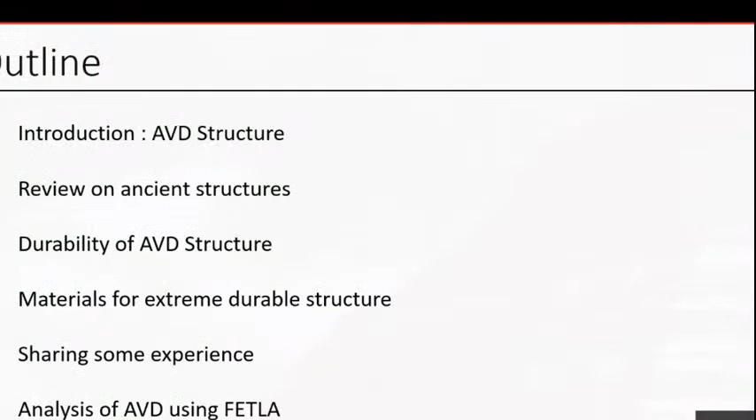We'll be discussing what AVD is, because AVD is nowadays not much practiced, so I won't be surprised if many people are not aware of the terminology AVD. We'll review ancient structures and see why these AVD structures are durable, and why structures constructed by us are not durable, at least in comparison. We'll talk about materials, and I'll share some of my experience. And because this is organized by ISSE, the Association for Structural Engineers, and the eminent Walchand Engineering College, I thought it worth discussing the analytical aspects. I'll avoid going too much into equations, but it's my duty to share some analytical facts and aspects of AVD structures. So that's what I've covered in this presentation.

So what is AVD? AVD is basically arches, vaults and domes. I'll try to correlate it with our current practices so you can grasp it quickly. Arches are the ancient equivalent of lintels, or rather, lintels are a replacement for arches. And the roofs we construct today, like slab and beam, along with walls, are replacements for vaults and domes.

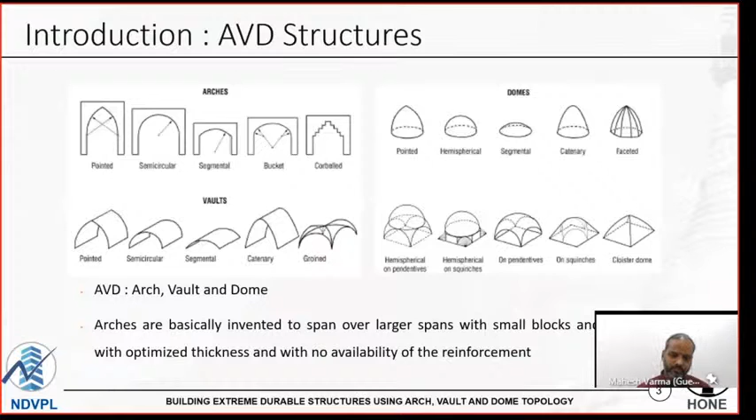I'm showing you two early human constructions. One on the left hand side is a flat shape construction in England. Archaeologists have diversified opinions on whether it's a place of worship, a burial ground, or something different. But to me, as a structural engineer, it's a lintel, a flat lintel. Human beings constructed this 5000 years ago using heavy flat shaped stones weighing many tons. It's one of the world's wonders because it was constructed 5000 years ago.

On the right hand side, you can see an aqueduct construction done by Romans almost 2000 years ago. Now why did humans shift from flat shapes to arches? It's because he understood that if he wants to span over a larger distance, it's very difficult to handle a flat shaped stone of that span. So if he wants to construct a larger span with a smaller stone, the answer is arches.

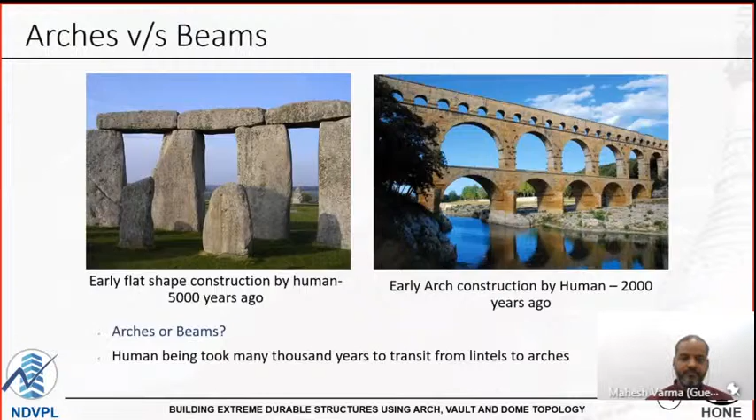I tried to find the answer in nature. I believe that as human beings we are already suffering huge losses because we are standing against nature. We are almost in quarantine at home, using masks and taking so much care. Even this webinar is a result of that situation. And the situation is probably created because we stand against nature, not along with nature. So I tried to find my answer in nature.

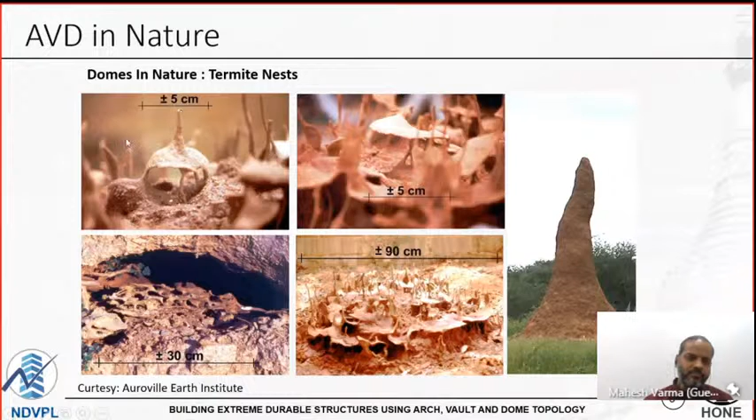I saw that any living being constructs in curvilinear shapes. Like here, you can see a nest of termites. It's a beautiful domical shape with a very meaningful tail at the top to balance the dome geometry. You can see the same in nests built by birds. You can find a few examples in ancient construction as well.

Our ancient builders most of the time used curvilinear shapes. Like here you are seeing the Kedarnath temple, a very famous temple, which has arches for the openings, not flat shapes, and it has been standing for many centuries.

On the right hand side you can see the construction we are doing today. Now we have associations for retrofitting, conferences for retrofitting, so many books, techniques, and materials for retrofitting. But I don't understand why we forget to ask ourselves the main question: why do we lead to a situation where we need retrofitting in even not 20-30 years? Almost as soon as we complete construction, we can see cracks over the structure, so we start applying crack seal before paint. So why are we leading to such scenarios?

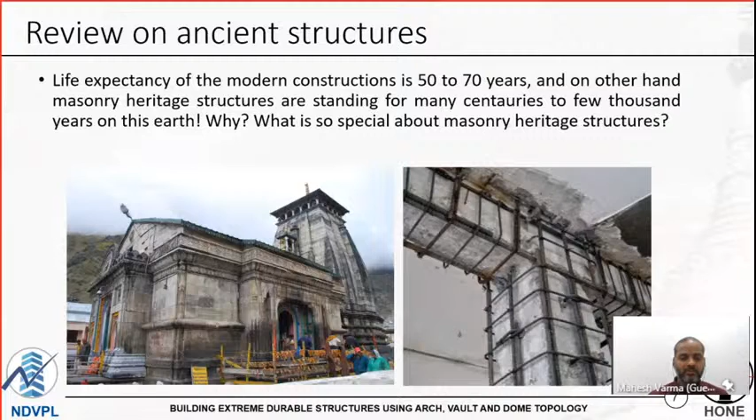And what is so special about these masonry heritage structures that they are standing for many centuries, even thousands of years? Here I am citing a few examples, which I know almost all of you must have visited. Gol Gumbaz, Bijapur, has been standing for 350 years, with a span of 41 meters.

I did a couple of projects where I built a 20 meter span, 25 meter span beam, and I was happy, showing people I made a 25 meter span. But somebody created a 41 meter span 350 years ago. Was he having better material? Like I am using M30 concrete for a 25 meter span, was he having M200, M500? Or was the steel, rather than Fe500, Fe1000 or Fe2000? Probably not, in fact not. So how could they manage such a span? Probably it was not the strength of material. Then what was it? We'll try to debug.

The second example is the Khajuraho temple, which has been standing for more than 1000 years. Come on, whatever we construct today, we never talk beyond 50-70 years durability. I attended a conference for Mumbai Metro where they discussed the possibility of 100 years durability. And these ancient people constructed something standing for more than 1,000 years.

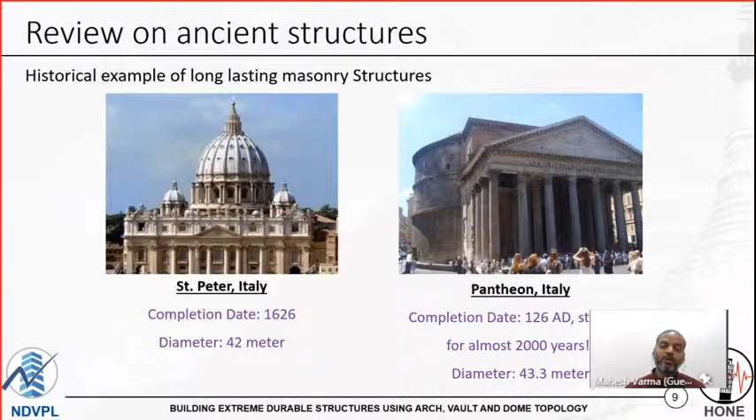A few examples we can cite even from outside India. Of course, there are examples all over the world. There are old developments which have sustained, and most of it is old masonry - Saint Peter's 42 meters, Pantheon 43.3 meters, standing for more than 2,000 years. Roman structures.

Not just old structures - I won't say we have really stopped practicing, because I know a few people who are still practicing in old masonry. One I am citing here is a vault constructed by Auroville. Very impressive - why it is impressive is that the span is 10 meters. It is constructed using mud bricks, not fired bricks.

Just molded mud bricks, stabilized mud bricks, and stabilized mud mortar. So obviously it has very low strength. And the thickness at the root, that is at the springing point, is just 20 centimeters, and at the crown it is 14 centimeters. It has no reinforcement.

Now imagine if I want to construct it in RCC, the same structure, 10 meter span. What would be my design? You all are structural engineers, you know how we design when it comes to RCC vault or RCC dome. We'll probably provide 250 or 300 mm thickness, both face steel, 16 mm dia, 100 mm center to center - not sure in which direction, so probably both directions, both faces.

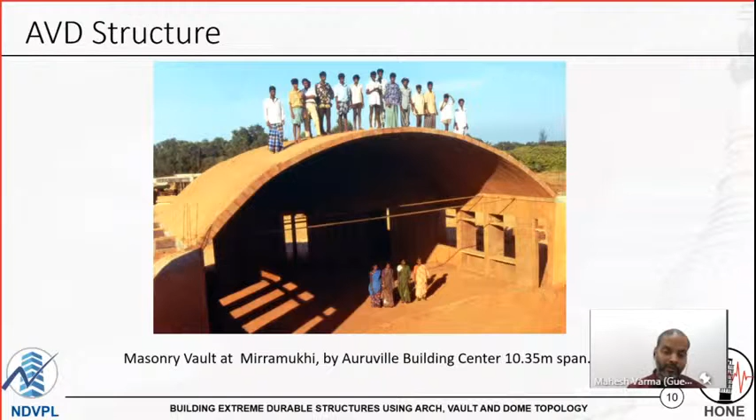But we are all the time focusing on strength of the material. Our engineering starts with the subject of strength of material. So suddenly, what is this new thing that came across? We need to debug, we need to understand.

Okay, so AVD is very good. We understood it's aligned with nature, sustainable. So why did we abandon it? Why are we not practicing it? And strange thing - why is it not in the curriculum? Why are we not even learning it? We are learning Kani's method, we are learning moment distribution method, which are more like a history of structural analysis.

Because nobody is practicing it, everybody is using matrix method. Still we are learning it, because we think it's important to know the history of analysis. We want to know the basics of analysis, we want to feel the methods of analysis. Then why don't we want to feel about AVD? Why did we abandon it from our curriculum?

Is it a lack of durability? Obviously not, because we saw these structures standing for so many years. Is it lack of strength? Again, not, because these bridges were designed, for example, for animal-driven vehicles, and what are we using them for now? We are using them for transportation of heavy trucks. So it's not lack of strength.

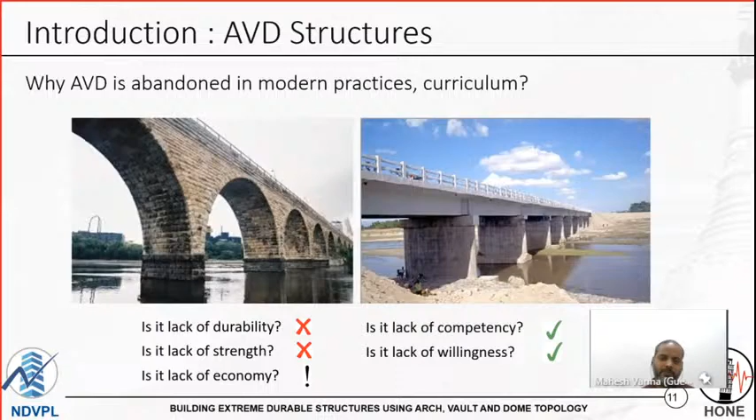Okay, I'll get back to my AVD topic - why are these structures durable? We all understood that AVD structures are durable. I have shown you there are so many structures even on seashores which are standing for 1,000 years. The question is why? We saw that it's not the strength of material. Then what is it that we need to understand? So we'll go ahead with it.

That is what you need to focus on. So to understand the masonry durability aspect, we know that structures standing on earth for more than 1,000 years are typically built of AVD, that is arches, vault, dome. And there are three reasons for this durability. One is the nature of stresses in the joint, which is always compressive.

What is so great about compression? Why is compressive more durable? Why is tension not durable? Because when we design steel structures, let us say we are designing a truss, then we are more happy with the truss member in tension, not in compression. For the same forces, we can provide a more slender member in tension. So we want more of the tensile forces, not the compressive. Then why do I want compressive forces here? Again, we'll discuss in upcoming slides. But yes, this is one major reason, the nature of stresses.

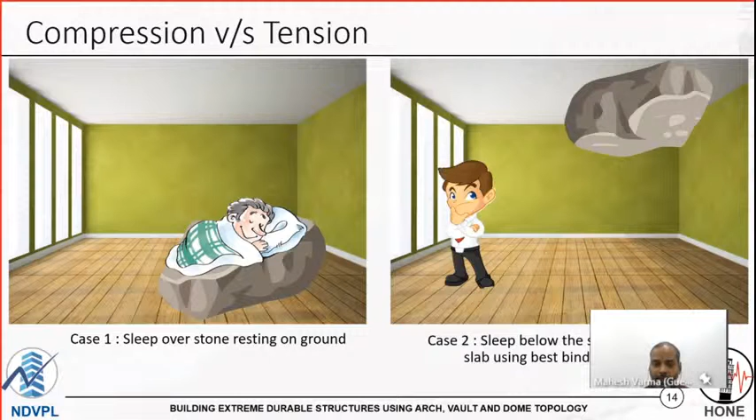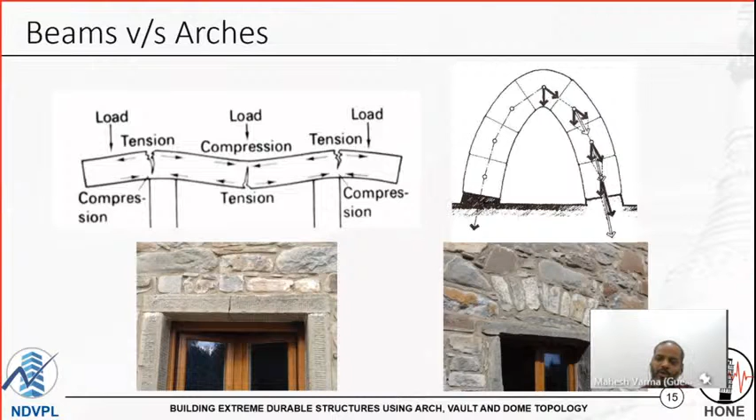Fatigue is not related to compression, it is related to tension. Whenever tension is there, we provide the steel. And then we start with the problem of corrosion of steel, then coating of steel, then so many things. But see the intelligence of these people - they altogether avoided tension from this structure.

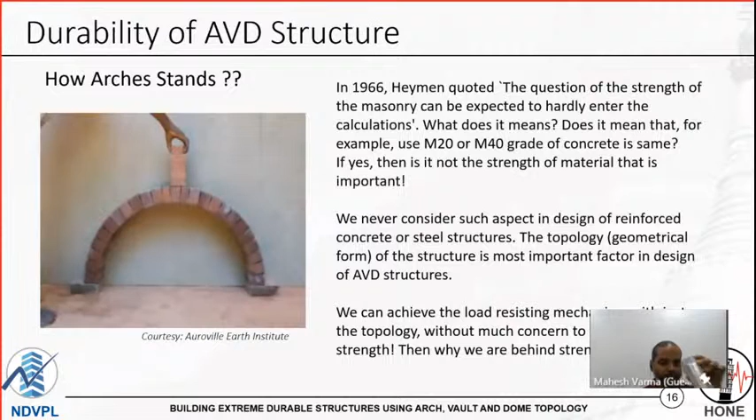So it can carry finite load without any mortar. Now we'll come to what Heyman has quoted. He quoted that the question of strength of masonry can be expected to hardly enter the calculations. As such, this is a very simple sentence. But what does it mean?

It means that M20 or M40 is the same. It means we are not focusing on strength of material. We never considered such aspect in design of reinforced concrete or steel structure, because whenever we are doing RCC structure, whether we ask for sieve analysis or not, whether we ask for workability test, etc. But for cube test, certainly we are going to ask whether you have done the cube test, what is the strength of the concrete. So that is our point of focus.

In this structure, the topology, that is the geometrical form, is the most important thing. In other words, we came up with new terminology which should be called strength of geometry, not strength of material.

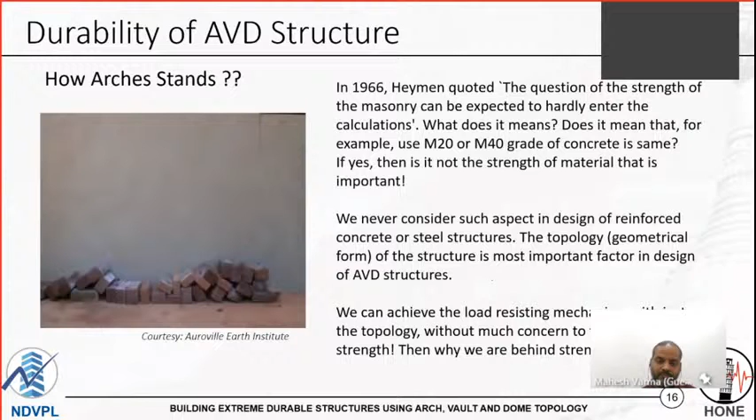But okay, as I said, we are always confused as structural engineers, and we provide both face reinforcement, in both directions, for such structures. I am not different. Everybody is very much limited by his knowledge. When I was limited with my knowledge regarding this AVD, I used to do it. So these people have provided reinforcement in the arches.

Then obviously it's Mumbai. The reinforcement started corroding, so they started retrofitting it. Once, twice, thrice, and finally they took down this arch, demolished it, and constructed it again just a year ago, using higher grade steel and higher grade concrete. That's our understanding of AVD.

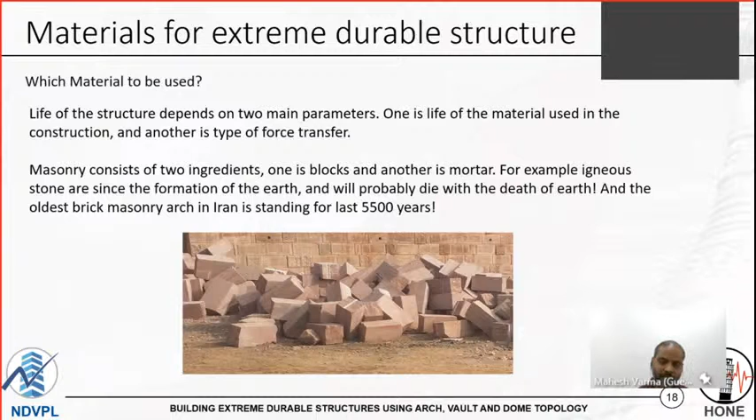Even mud bricks, fired mud bricks - the 5,000 year old arch is still standing in Iran. Why? Because they put everything into compression. I'll talk about the material a little more when I'll be talking about lime.

So after stones, for masonry you need blocks and you need mortar. Of course, you can do it mortarless also, as I have shown in that arch experiment, but that needs huge accuracy. If you go to Hampi, the temples are built without mortar, most of the temples, or with very thin mortar layers and huge stones. So if you can construct that, if you can get rid of mortar, then durability is not 100 or 500 years - durability is millions and billions of years, if not retrofitted and restored by our modern engineers. Underline that.

But for routine tolerance, whenever we are constructing, the stone shape has some inaccuracy, so we need a filler material, and we typically use some sort of mortar. Nowadays we know only one mortar, that is cement - cement, sand mortar. But these ancient builders used lime. Some archaeological people are also using lime in their restoration works.

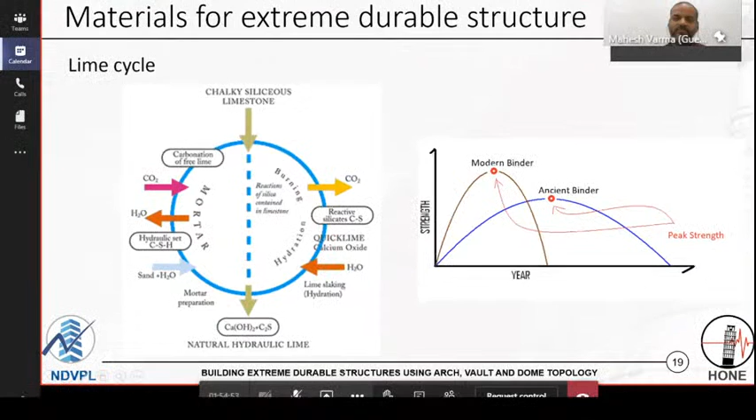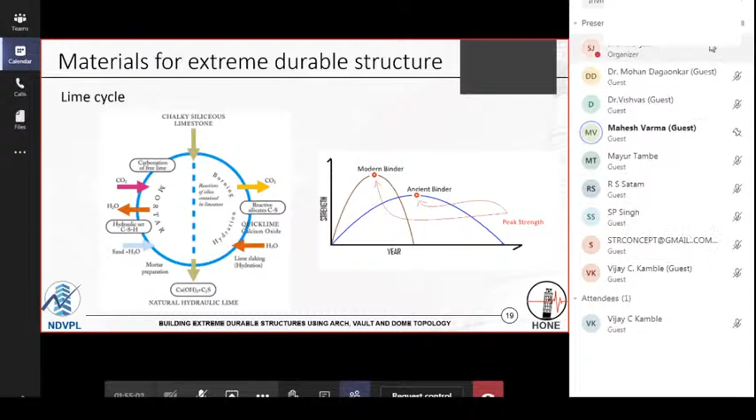The nature is very simple. If the sun takes 6 hours from sunrise to noon, then another 6 hours it will take to sunset - that's the nature. If noon comes after only 1 hour from sunrise, the sunset will be in another 1 hour.

So as shown in the graph on the right hand side, modern cement gains early strength and loses it early - early deterioration. For hydraulic lime, it's slow gaining of strength, so obviously deterioration starts after you get the peak strength. So the deterioration cycle is also very long. That is one benefit from a durability point of view.

But there are two other important benefits, which I will show you in the left diagram. When lime is burned, it releases CO2. When you slake it, H2O is added and you get Ca(OH)2. Then when water is added, it releases again and absorbs the CO2 - so CaO back to CaCO3 again. That's the lime cycle. It keeps absorbing CO2 for many hundred years, as long as the setting continues. The result is that the carbon dioxide content of your structure is very low.

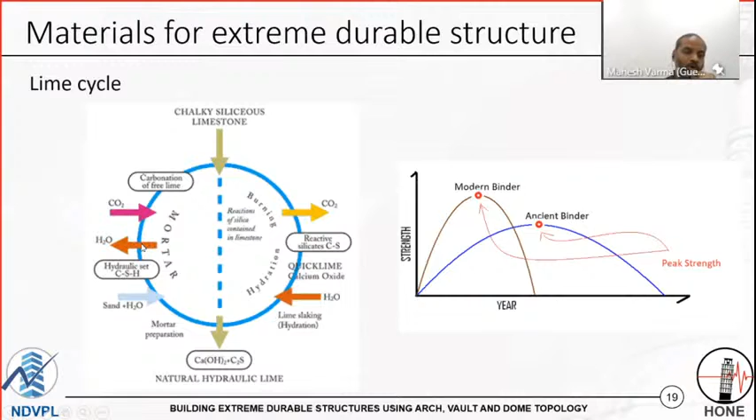Secondly, as you can see, when lime sets, it releases H2O, and H2O is required for the silica part for setting, because it's a natural cement. So the water required for curing of mortar is readily available, released by the lime. In turn, it works as a self-healing material. So when construction is finished, if you observe minor cracks, within 3 months you'll observe that the cracks have vanished. I have observed this on my sites many times, practically.

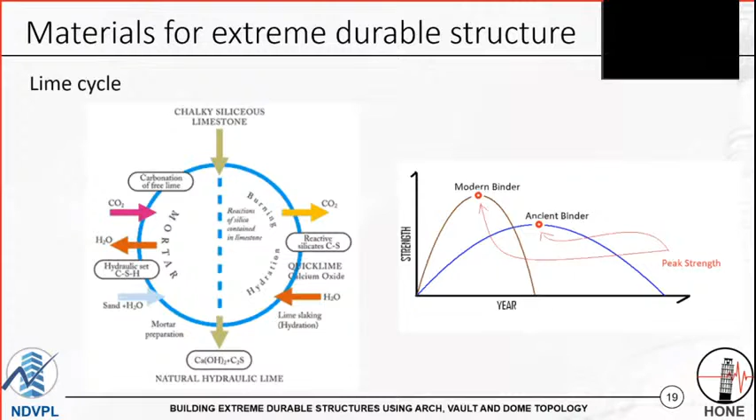Whereas if you use hydraulic lime - hydraulic means one which can set under water - so if you get lime which has an impurity of silica, you can use it for construction, and the strength you can get is very significant. For 30 days strength I will not focus much, but 90 days strength with lime we are getting above M50 for mortar. That's a significant strength we are able to achieve on our sites and in our lab.

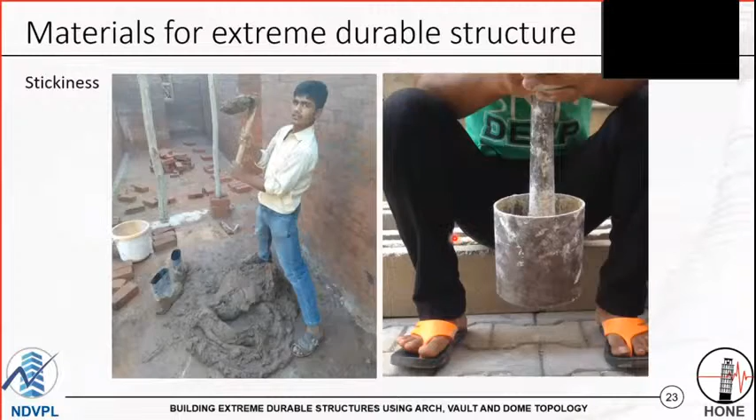If you are using lime just because it has the name of lime, I'll show you what happens.

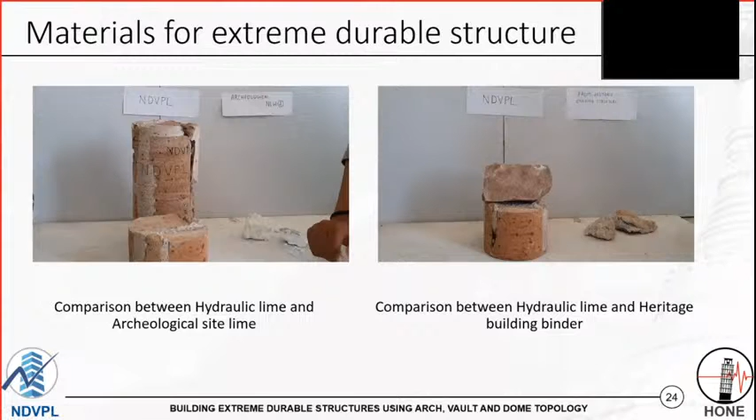In this video you can see my engineer showing the strength of the lime we are using on our sites, and the strength of lime from archaeological sites. It's very brittle because they are using pure lime - they don't understand the difference between pure lime and hydraulic lime.

Now he is comparing the lime again from our site - very strong, compared with the lime of ancient construction. Similar strength because the binders are similar.

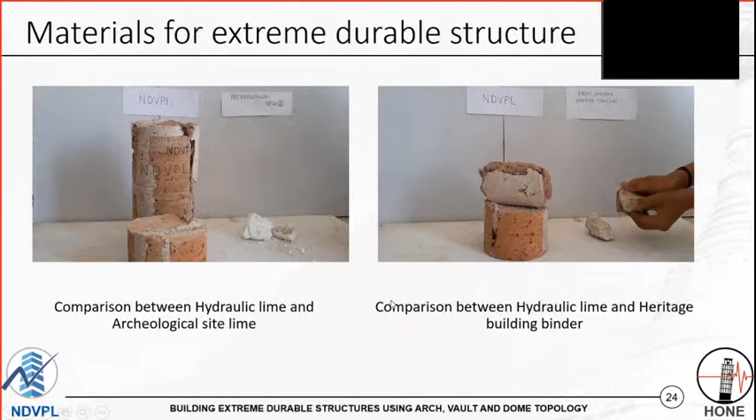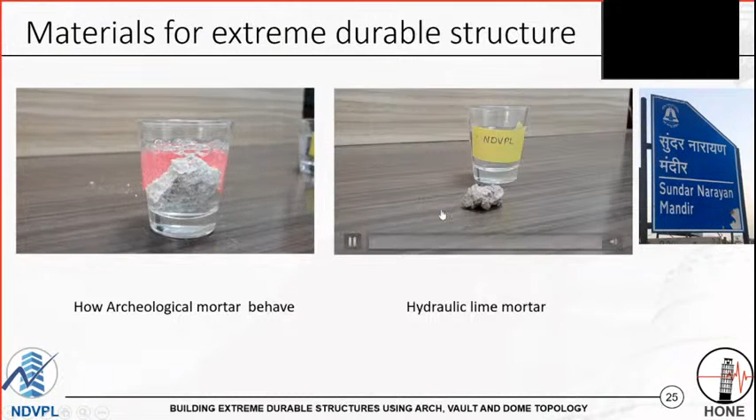It's not just about strength but also about porosity and so on. This is archaeological mortar - you can see how porous it is. And on the right hand side you can see the mortar from our site, not at all porous.

We are trying our bit to do a lot of experiments, which we are able to do even though we are not an aided organization for research. We don't have any funding for research. We raise our funding from our projects and try to do whatever best we can. Of course, there is strong support from institutes like IIT, the Technical University of Milan, and other universities working with us, or the Auroville Earth Institute, for example. They are also working in collaboration with us on many projects.

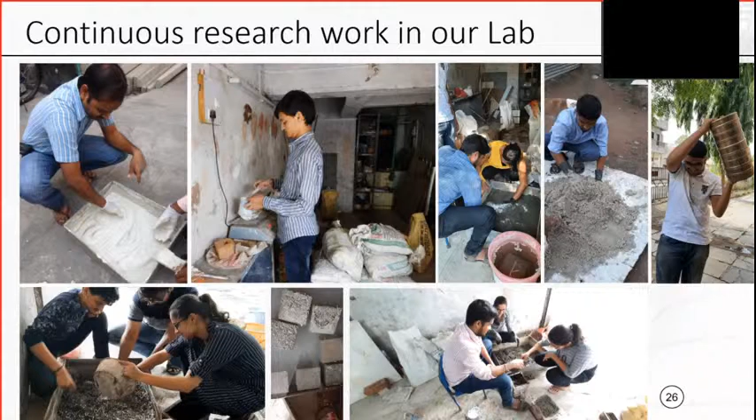So yes, we are trying to do our best, but I know it's just the beginning. We are at a basic stage. There is a lot to do, and probably institutes like Walchand Institute can certainly take it ahead, and should take it ahead.

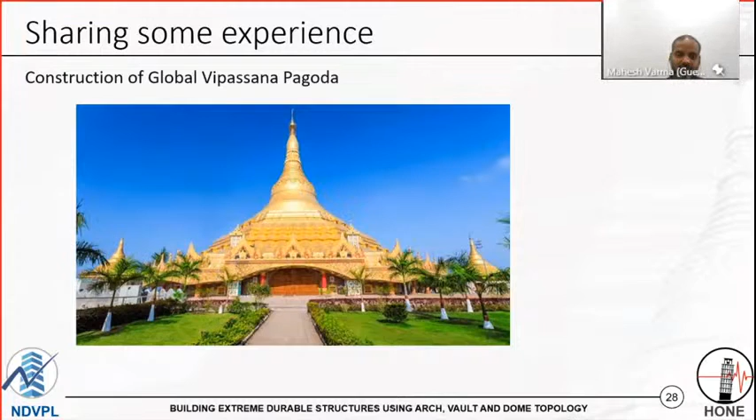I'll show you some of my real life projects so that you can get a better feel of AVD construction - how these are done, and the typicality of these constructions. One is of course the Global Pagoda, which was very kindly mentioned in the introduction also. Yes, it's a very massive structure - a structure with a height of 90 meters.

When I talk about AVD, people typically ask me how many floors we can go. This structure is like 30 stories high, which I designed, not constructed. It's already constructed at Gorai, Mumbai. It's in existence, and the clear span is 85 meters.

85-meter clear span. RCC beams you will not provide. PT you will not provide. Steel structure companies would probably run away from this. That we constructed using stone and lime.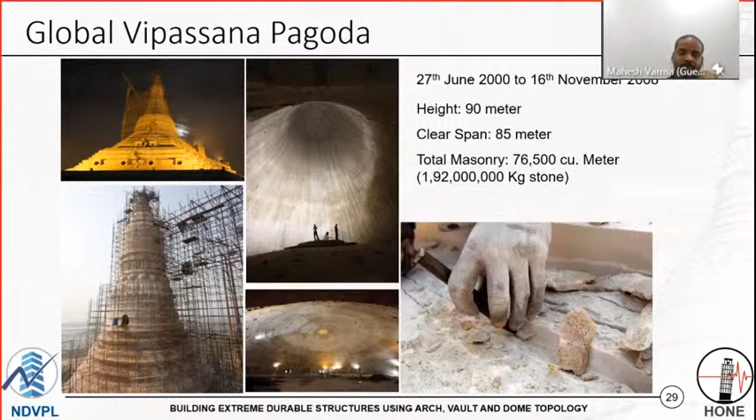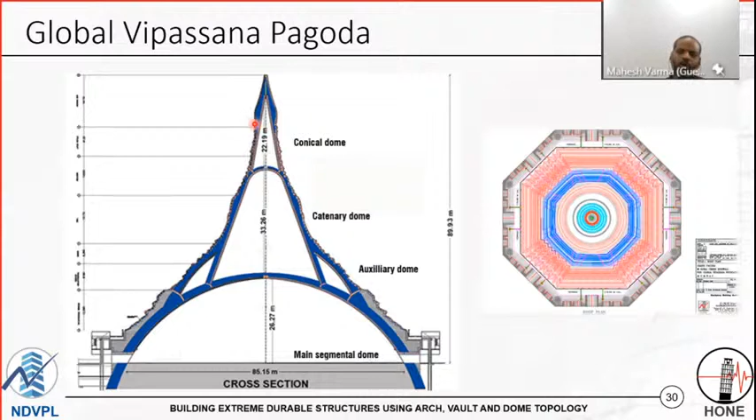Here you can see some photographs under construction. On the left hand side, the first photo, you can see the 85 meter span - the cranes look very small in front of those spans. It's constructed without any centering. In the second photograph you can just see the scaffolding, which looks more like a cantilever, but it's not cantilever - every ring becomes stable once it is completed.

The third photograph shows 10,000 people accommodated in a single hall under a single roof. And here you can see real carvings of the stone from the same site - you can get a feel of it.

The next photo shows the discussion going on about construction of the upper domes - how to handle the stone, how to put the stone at such a height of 90 meters, and whether we could use cranes. RS Jangid was proof consultant for this project, more like a guide and mentor to me. He said, Mahesh, why don't you try putting a load on your first dome and check how much load you can put. The crane load was so insignificant that you can see cranes moving over the first dome and working with so many stones, and we constructed the second and third dome.

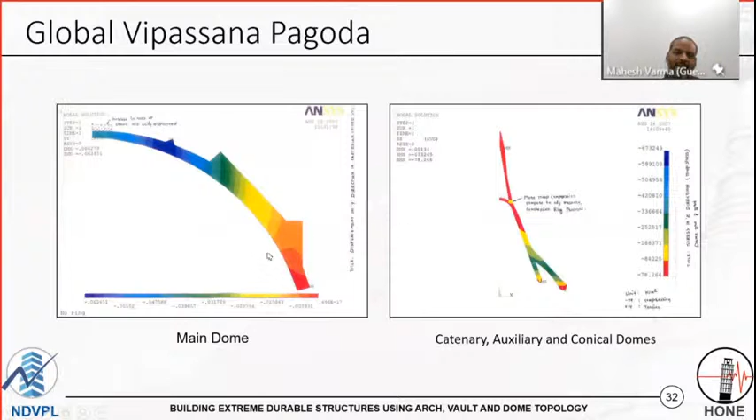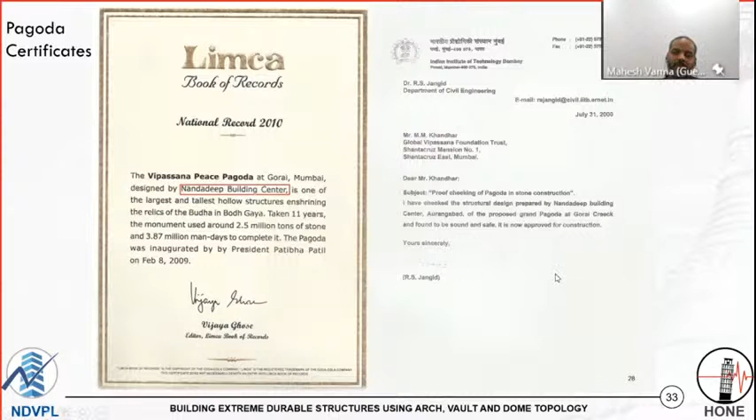We'll discuss the analytical aspect later in the presentation. This structure is already recorded under the Limca Book of Records for design. We should all be proud because it's in India. The Pantheon has a span of 43 meters; we constructed this with a span of 85 meters, so 4 Pantheons can be hosted in this single structure - the area is 4 times. So you can host 4 of the largest stone masonry domes built before this in a single structure. It is certified by IIT Bombay for earthquake resistivity and design parameters.

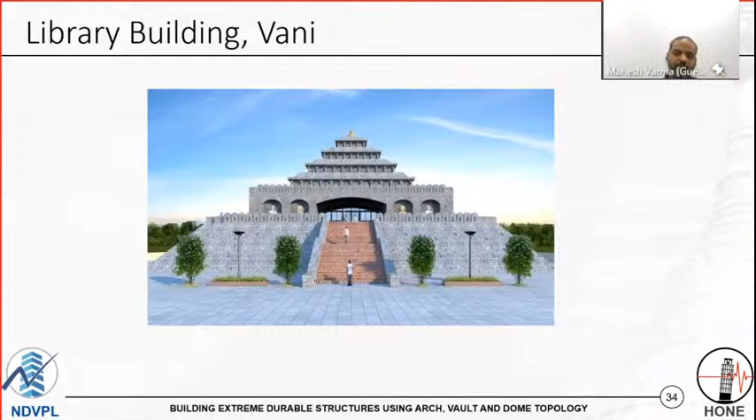Now, another interesting structure we are doing is at Vani, in Nasik - it's for a library building. Again, stone and lime. Here you can see it's under construction. The 4 columns are constructed, and we are in the process of constructing the arches.

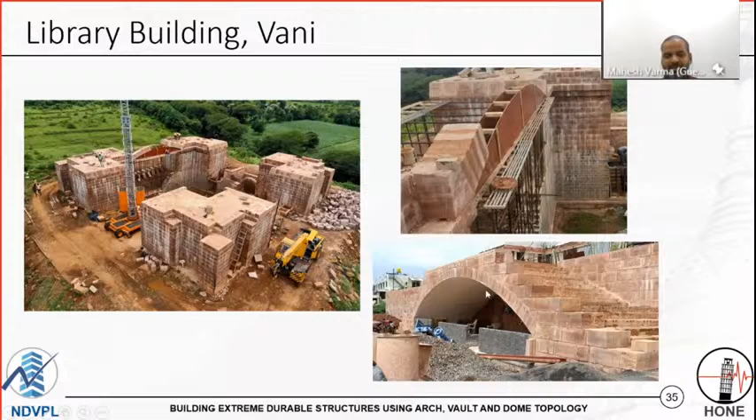For some allied structures, you can also see that we have constructed the arch staircase. Here you can see in photographs the checking of the centering, because shape control is, as I said, not strength of material - it's strength of geometry. So when you are talking about strength of geometry, you should be very particular that your geometry is perfect.

Your geometry can be perfect only when your preparation is perfect, when your centering is perfect, when your method of construction is perfect. So we always keep discussing how we are going to construct this profile - what is our methodology. We work with the contractor to decide and finalize the methodology for constructing the geometry, and I'll tell you, it's not very difficult - it's very easy once you start understanding it. The methods are very simple. If some mason can construct a straight wall, he can very well construct the arch, he can construct the vault, he can construct the dome.

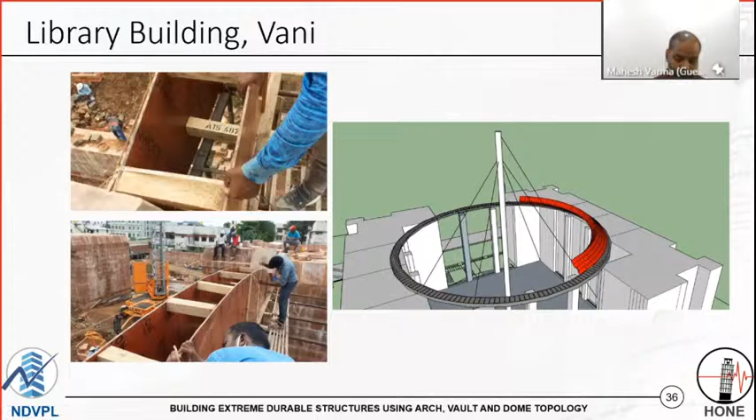On that same site, we have constructed this kiln, we have a pulverizer - it's more like we have a cement plant or lime plant, because hydraulic lime is not commercially available, so we are bent on manufacturing it for our purpose and then using it.

We are doing some projects for the government of Maharashtra as well. Here, as you can see, for Chikaldara, we are doing a guest house building.

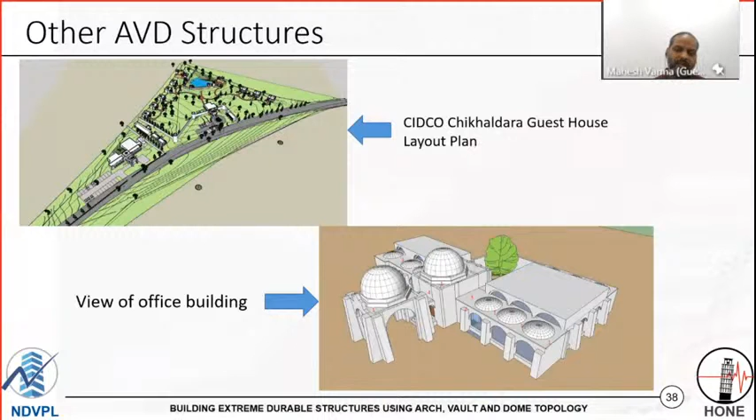I'm doing some residential projects also. You will say, what's so great in a residential project? It's a small project, but there is a lot to learn in these small projects. I will show you rampant, I will show you vault, I will show you vault construction, and you will be amazed by the way it is constructed. Think about it - you have a house with lower carbon dioxide content, more livable, more aligned with nature, more durable. What else is required?

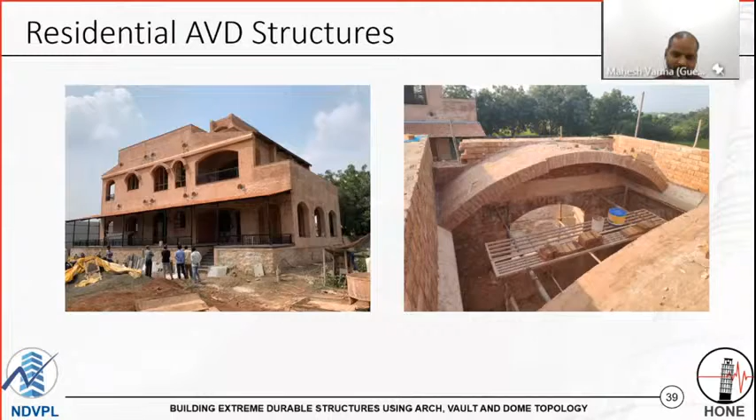So here is a video for vault construction. It's very interesting how we are constructing the vault without any centering, using hydraulic lime and red bricks.

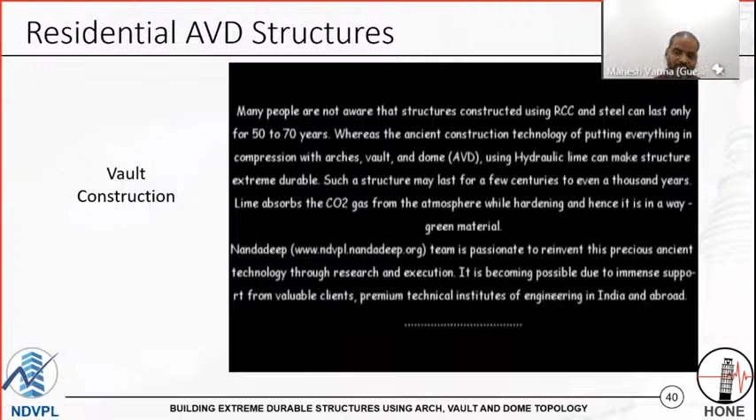So here you can see the mason who is constructing. As I said, it's not difficult - the mason who can construct a straight wall can construct curvilinear curves, vaults and arches. Typically, I always use local masons, I do not use special masons - I should not take credit. My wife takes the lead in training and site execution. She takes more of the training part, and we train the masons for construction.

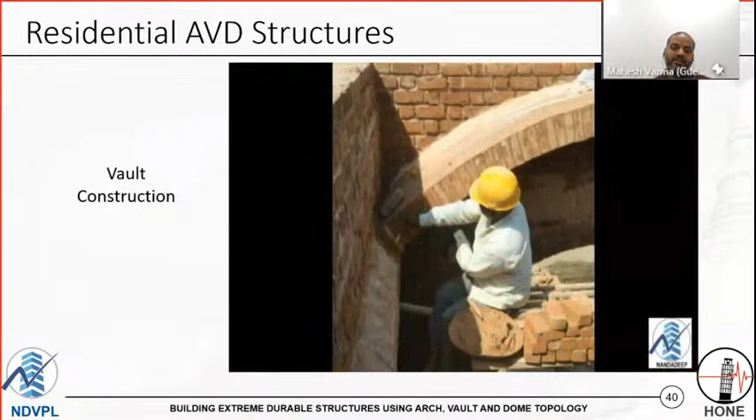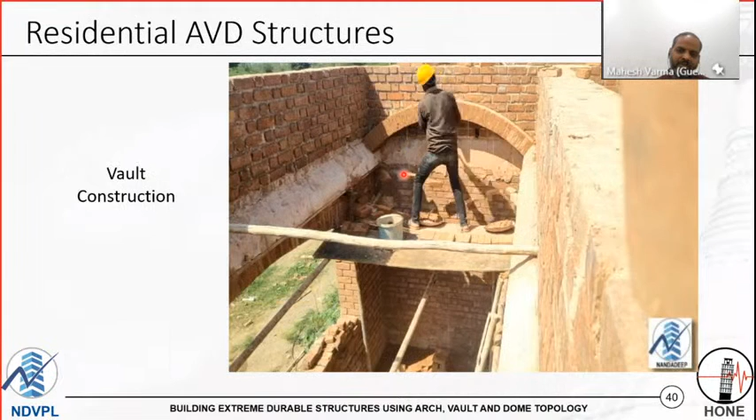As you can see, the mason is putting brick after brick, sticking it - as I said, the lime mortar is very sticky, so the brick can very easily stick to the previous brick. You keep constructing, requiring no support. Just at the central point, he is putting a thread to check whether the joints are radial or not, then putting another brick, and that's it. You can see some hanging bricks here - maybe if somebody is interested, we'll discuss why those are hanging. Okay, so I'll move ahead.

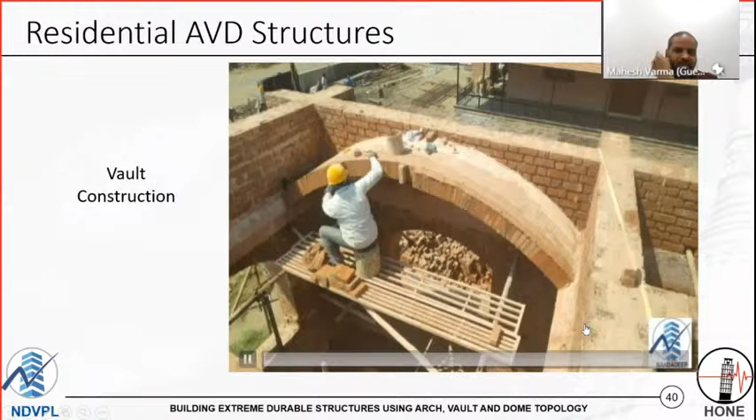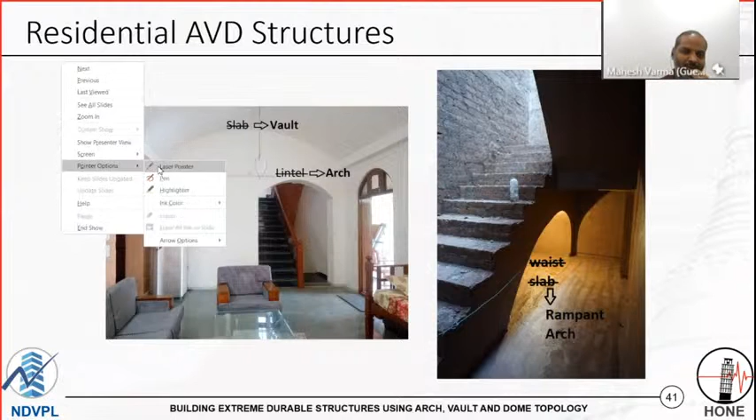Here you can see the vault under construction, then another stage towards completion, arches after arches, and closure. On the left hand side is a completed house with this beautiful vault. I must point it out.

The rampant arch staircase is also not RCC, using a compression profile. Arches not lintels, vaults not slabs, no RCC, brick load bearing walls. On the right hand side you can see a rampant photo under construction.

This rampant is a very interesting profile. I must admit I am at a very primitive stage to understand this technology. This photograph shows a rampant arch constructed by ancient builders, at a castle in Rome. I've forgotten the name of that castle. There I saw this rampant arch with an almost flat profile. I am still to dare attempt it.

I analyzed it and found that, my God, with such a small rise, it's possible. I can construct it, but the level of accuracy probably needs a lot of hard work, or maybe someone else will work hard, and one day human beings will be capable of constructing such profiles. I hope so.

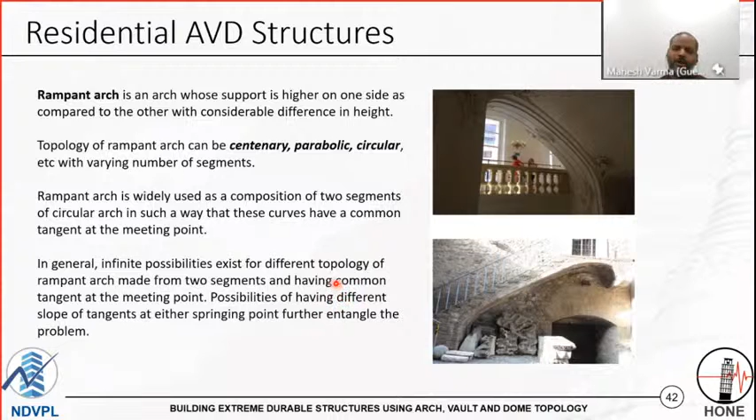Typically a rampant is an arch flying from one level to another, which can be used for a staircase. It can be catenary, parabolic, circular, or many possible shapes. Most of the time we use segmental. We typically design firstly catenary and try to fix segmental shapes that match the catenary shape, because segmental shapes are easy to construct.

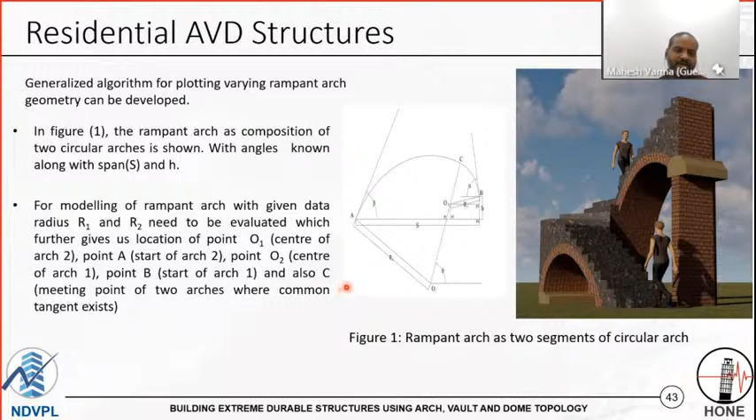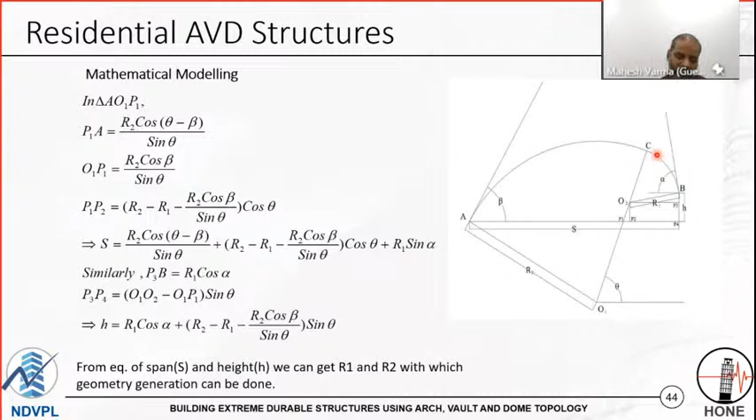It involves some mathematical formulation, but I don't want to go deeper into it, time doesn't permit. So I'll just run over it. Basically you need common tangent points for different segments of the rampant arch, and you must be sure that the thrust is passing within the geometry of the structure.

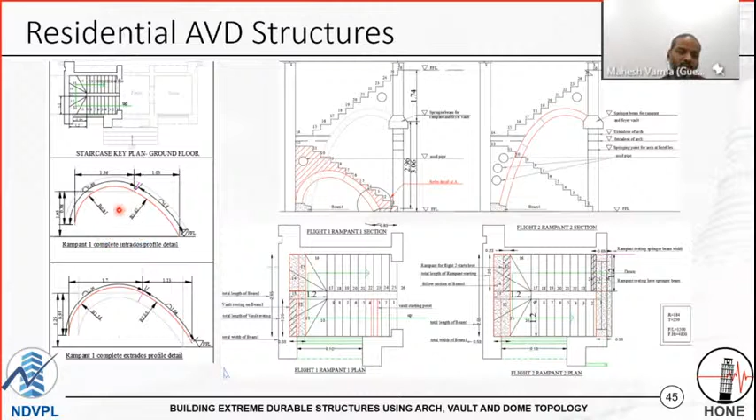This is the drawing, showing how we detail the radius and center, if a center is available. If a center is not available, we have to work with the contractor to assist him in drawing that profile.

We also did arch foundations in our project, very successfully implemented.

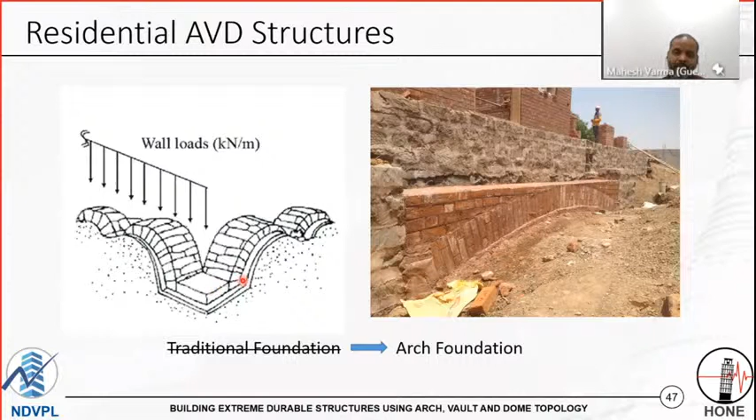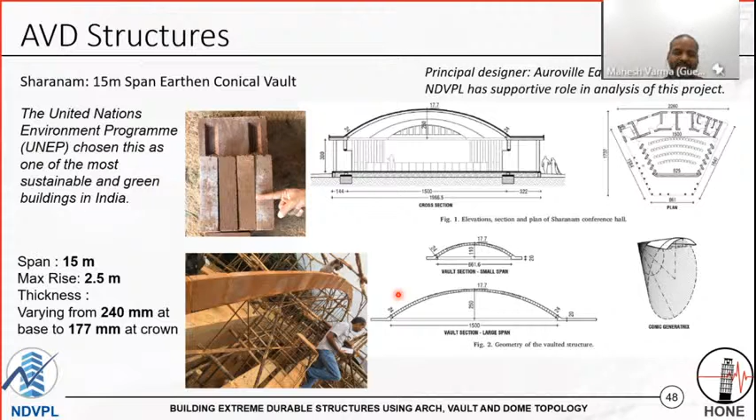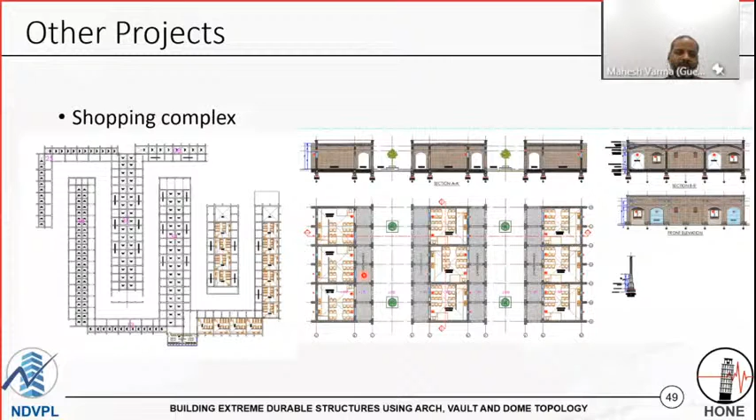We are also doing some other projects for the government of Maharashtra, like Grishneshwar temple development, Sabha Mandap, Bhakta Niwas, etc.

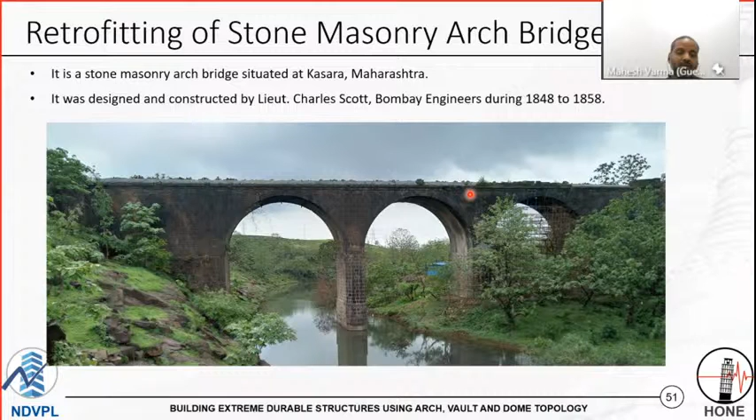Probably 1,000 crore, 10,000 crore, lakhs of crore, I don't know, nobody can valuate it - valuation is impossible. So when dealing with such structures, I sincerely request that we try constructing some arches on our own. We should try it, learn it, and only then disturb this structure. I strongly believe that the way we are doing retrofitting of masonry structures, we are deteriorating them early rather than retrofitting them. Anyway, I won't stress much on this point.

But we did a methodological analysis, we did structural health monitoring, like Hone Structural Health Monitoring India Private Limited - my other company works in structural health monitoring. So we put a lot of equipment to check the growth of crack, change in crack width with temperature, with humidity, with movement - everything to establish and check our mathematical model, to be sure that whatever analysis we are doing, we understand the behavior of the arch, and we are not demolishing the arch bridge just because of a single crack.

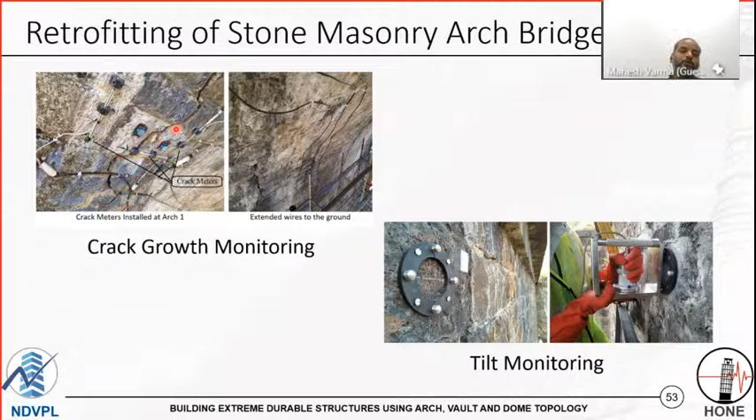And finally we came out with the retrofitting scheme for that particular arch bridge, which is under implementation now. We also do workshops for teaching vault construction and arch construction.

Very quickly we'll move to the analysis of AVD structures. We are running out of time, so very quickly we'll take another overview - analysis of AVD structures.

Here I have cited a good statement from the Alchemist. It says that we typically complicate things. We love to see things in a complicated way rather than a simplified way. Probably when we finally understand everything, we will realize the things were very simple and basic. And that is true about AVD structure analysis.

I really want to emphasize this because I see many structural engineers who complicate it like hell when it comes to masonry analysis, and make very ineffective, inappropriate use of finite element models. That's what I many times see.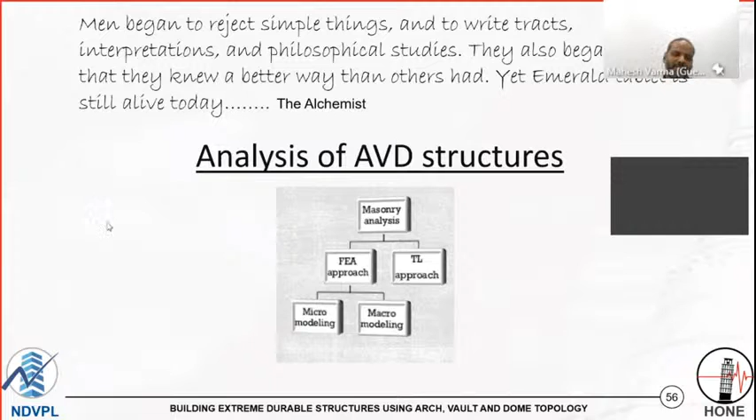So just an alert for young engineers: when you are using tools like finite element, you should be very cautious. Basically, it's a geometrical analysis. It's not a strength of material analysis. It's based on basic assumptions.

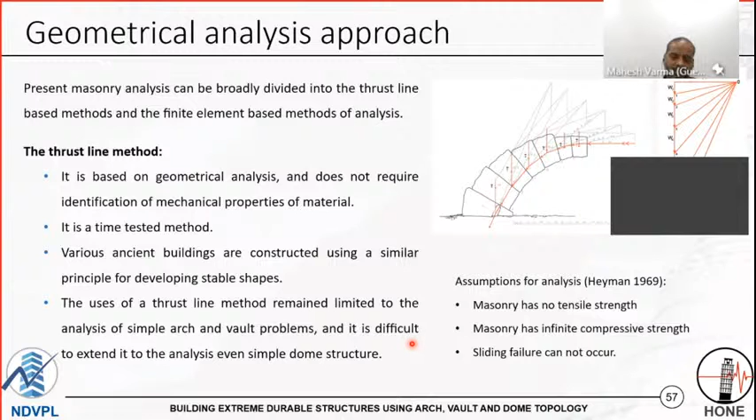Like here I have mentioned, masonry has no tensile strength, infinite compressive strength, and sliding failure cannot occur. These are the basic assumptions to simplify the analysis, and these are valid assumptions. Heyman has given a detailed explanation why these assumptions are valid and how, due to these assumptions, strength of material goes outside the picture. So somebody can refer to his paper rather than me to discuss much about it.

As I said, finite element is the most misused method for the analysis of masonry structures. Why misused? Because what kind of analysis result are we getting? We are getting stresses, we are getting strains. But I already mentioned that stresses are not important because strength is not important. So the output we are going to get is not at all useful for us.

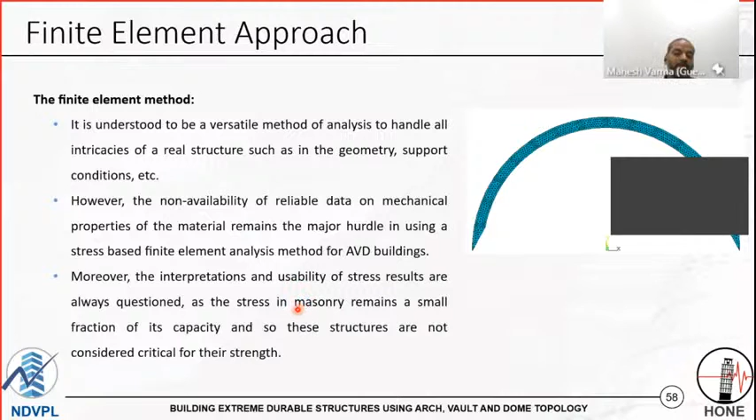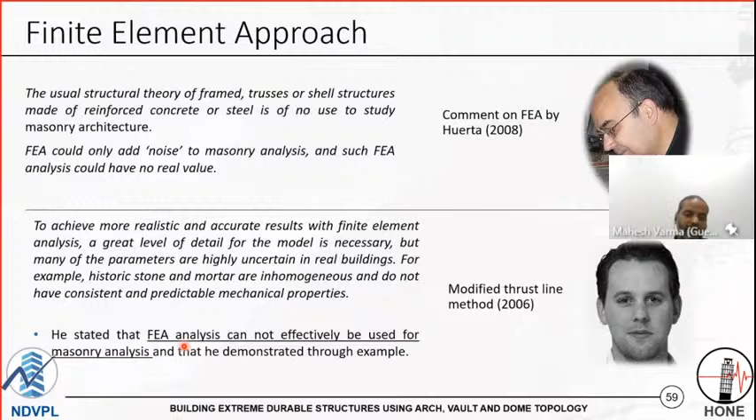Moreover, it's impossible to do interpretation of the mechanical properties of the material. I am citing just two eminent researchers here. One, Huerta, says finite element analysis can add only noise to masonry analysis. From ETH Zurich, Philippe Block says that FEA analysis cannot effectively be used for masonry analysis.

Basically, ancient builders used geometrical analysis, which is like thrust line analysis. The benefit is it's very easy to understand. The difficulty is it cannot analyze complex structural behavior. On the other hand, if you see finite element analysis, the benefit is you can analyze any complex geometry, but the results are stress-strain. So what's the use of those results?

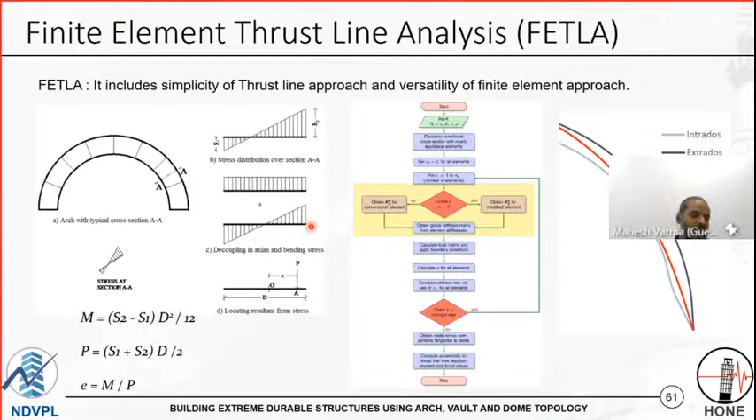So we came out with a completely new analytical approach, which is called FETLA. It's nowadays used by many universities, many engineers. It's a finite element thrust line analysis, which combines geometrical analysis with finite element analysis. I'll stick to the time schedule and not go ahead with my presentation, but maybe in some other presentation we can discuss more about the structural analysis part of it.

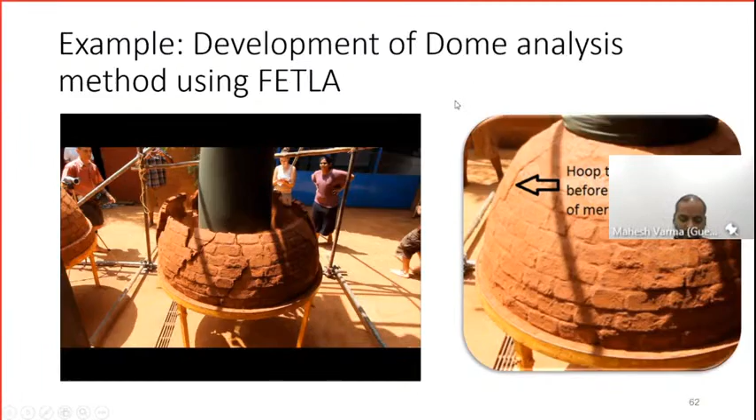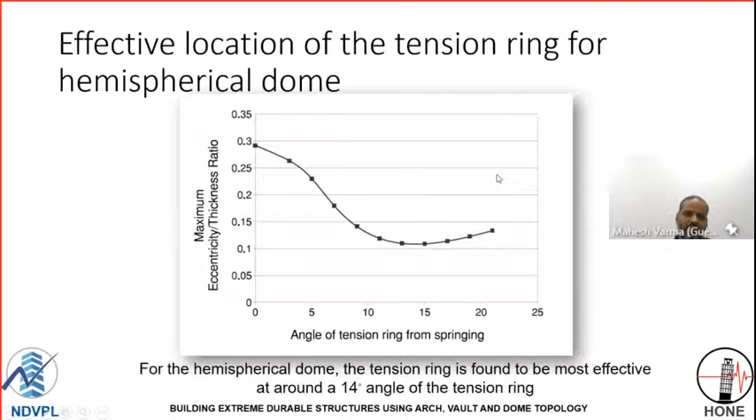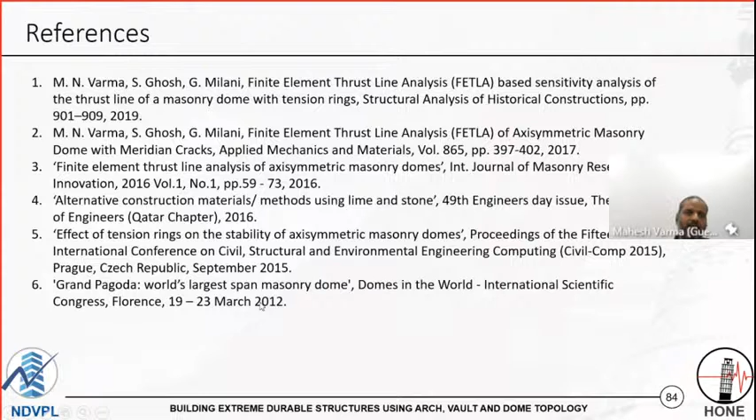I'll move ahead. It's very interesting how masonry can be analyzed. There are many publications which I have published on analytical aspects of masonry structures. Here the references are given. Interested audience who really want to go into more detail of the structural analysis part could refer to these references and get back to me on their doubts.

My last question to everyone: can we create heritage? If somebody who created heritage 1000 or 2000 years ago came to our world, they would be amazed to see that we are going to the moon, we are going to Mars, we are flying, we are running with so much speed, we are so developed, and yet we are saying that we cannot construct a structure which can stand for 1000 or 2000 years. Is it really our limitation?

We always say that we are proud of the heritage given by our forefathers, but what is it that we are going to give to our grandchildren? What will they be proud of regarding our generation?

Secondly, can we compare the peace of mind which we can get in these AVD structures built using lime, with RCC and steel structures?

We need to think about whether all our structures are going to be replaced before us. Like in Mumbai, we are constructing so many structures for 35 and 50 years; if we stop constructing, you'll again see only old buildings, no new buildings. That's the kind of structures we are building.

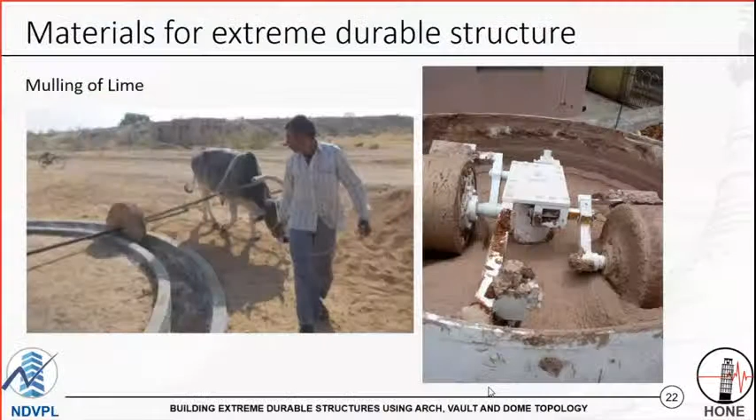I'll go to the next question. How can we ascertain the strength of an AVD structure? We can ascertain the strength of AVD structure by visiting Taj Mahal, by visiting Ellora, by visiting Ajanta, by visiting any ancient structures, by going to Kedarnath temple which survived when none of the RCC structures survived. We may not be certain about our capabilities, we may not be certain about our willingness, but there is no reason to blame AVD technology, no reason to blame this particular methodology. In fact, I'll share one small example of a discussion I had when I was doing work for the Government of Maharashtra.

One of the engineers representing PWD told me that these arches are not earthquake proof. I said, sir, the Taj Mahal is under you for restoration—why don't we replace all arches with lintels? Come on, this is a blunder statement to say that arches are not earthquake resisting. These structures are standing for so many centuries, these structures have faced earthquakes. So what other proof do we require?

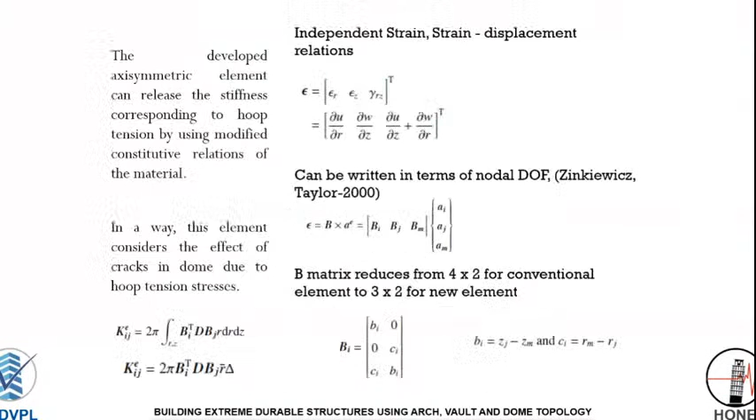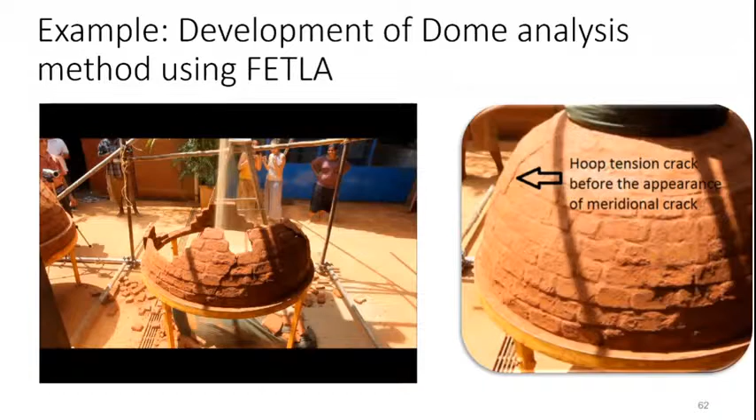The next question is how testing of AVD is done. Testing is, if you know how it can fail, you know how to test it. For example, here you can see testing which we conducted in collaboration with Auroville Earth Institute. We analyze the dome, we calculate the actual load it can sustain—a very thin vault, just a 2-inch thick vault dome. We constructed it with utmost accuracy, and we added the load using sandbags. Empty sandbags were put over it, and slowly, with a known rate of loading, we poured sand into it, and we saw up to what load it sustained. With a high speed camera, we captured the failure—which crack appeared when, from where the crack starts, and so on. These are all experiments.

And probably academic institutes are more capable to do the experiment. For me, I am not a researcher—I am a practical person who is willing to construct, demonstrate, and give society a usable structure. But because nobody else is doing research, I am forced to do research in this direction. I'll do my best to identify the opportunity with this technology and give whatever push I can provide.